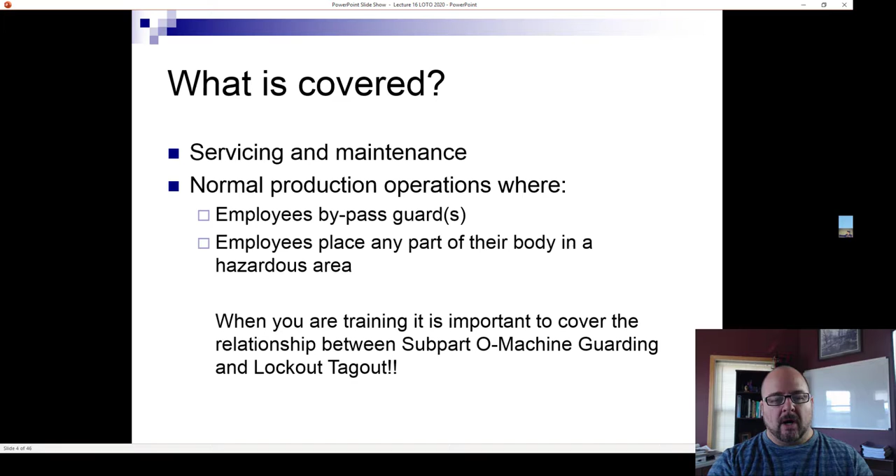So this general industry standard does not cover these other industries. It doesn't cover normal production operations. Also, it says cord and plug under control. And this is probably something you can relate to. If you go into your garage or your dad's garage, and he's got like a table saw or a reciprocating saw, any device that is just a plug, if you can unplug something and stick it in your pocket or be in control of it, it doesn't need to have lockout tagout.

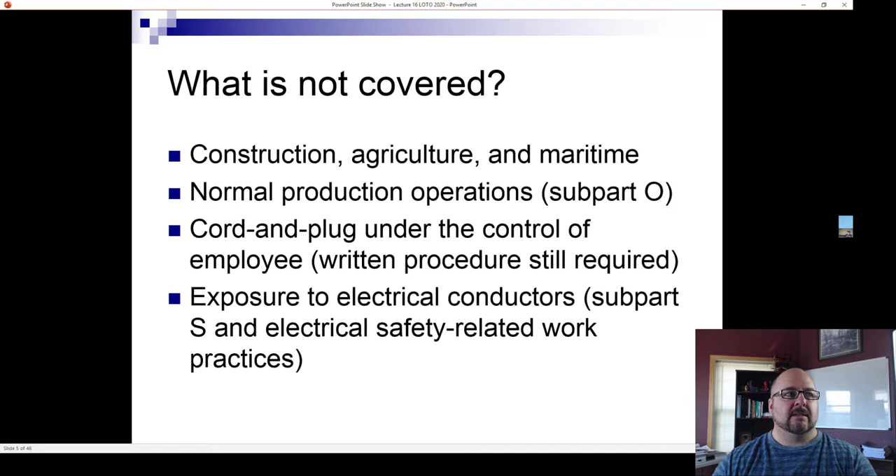It's more or less when you're at a sub panel and you have to turn off the sub panel. So electrical sources are usually above your typical household, so you're talking 220 or higher, in which you pull the switch. And that's when you lock it out, because you don't want somebody to turn it back on while you're working on it. De-energize it. You could either be exposed to the energy source, or it could actually activate the machine, and then you could get caught up in it.

Here are the different energy types. Electrical, very obvious, both shock and to get a machine moving. Mechanical energy, so if something is already moving, you've got to make sure that there's a brake to it, so you don't get hit. Hydraulic is liquid under pressure. Pneumatic is air under pressure. Chemical is a little bit more sophisticated.

I actually cited a hotel for lack of lockout tagout for their pool system, because they completely evacuated several city square blocks, and I went in and investigated. After a long holiday weekend, their pool was kind of cloudy, but the custodian who typically took care of the pool was on vacation. So they called in a pool guy. He came in, saw the murky water. He knew he had to shock the system.

And so he removed the screw cap for the tower that disseminates; as the water circulates, it adds the chlorine to it, and it might even have been bromine. He saw the tablets, filled up the tower, and as he was screwing the tower cap back on, all of a sudden it just exploded, and he was doused in bromine acid and everything else. So he dove into the pool to protect his eyes and his face, but the gas that was produced evacuated everybody, because it was a chlorinated or brominated gas, and that stings when you breathe it in or it touches a mucous membrane.

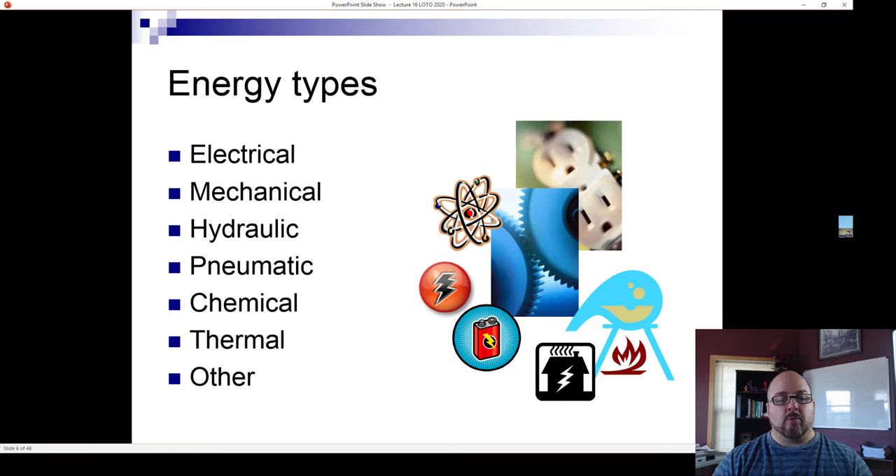Thermal as well. There could be stored thermal heat or a delivery system, like a compressed or a high pressure steam. But there's other things as well. Anything that could be delivered to a machine that if left on could affect the person or start up the process needs to be locked and tagged out.

What this basically means is you can't just do this alone. You can't walk up to a machine and go, I'm going to figure this out myself. You either have to have a maintenance person who knows all the energy sources or contact the company or whoever installed the equipment. You need to know where all the lines of power or energy go to the machine, and then know which valves are the ones that turn it off or on.

You turn it off, and then you need a locking device, something that prevents anybody from moving it from the closed position, and then a tag as far as who is the person who has the key that has the ability to remove it in order to put it back on.

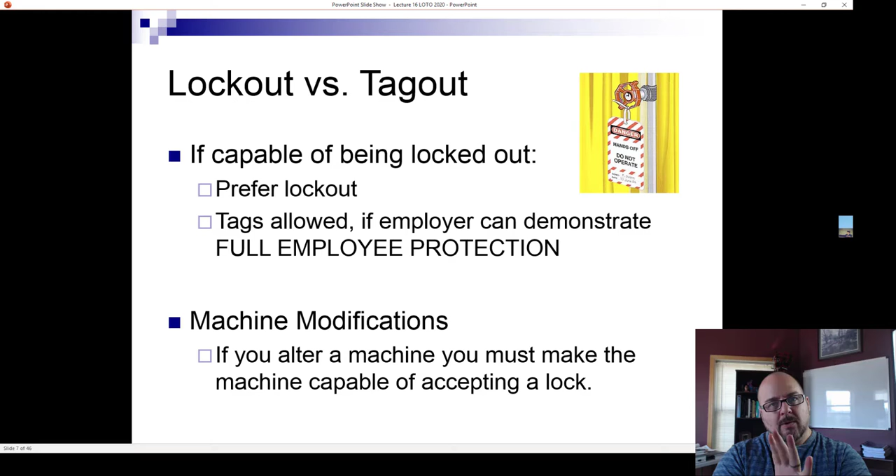And well, they'll get into it later when you watch the Brady stuff, but you should assign a particular color, or you should even have the photo of the person, so you should know whose lock it is without even looking at the tag. But the tag needs to be there as well. And this is for any servicing and maintenance. So the normal operators typically aren't involved. It's usually people who have specialized training that go through the lockout tagout procedure.

One thing I want to say is this is considered a performance standard, which means in order to be compliant, you as the employer have to demonstrate that it's effective. So you have to go a little bit further than if you just come up with a program. Even though a program should be based on evaluation and the best solutions, you have to demonstrate that this is an effective technique in order to de-energize a system or isolate energy.

An affected employee versus an authorized employee. An affected employee is someone who may be in or near during a service or maintenance. The authorized are the maintenance people or the servicing people. There's a lot more training when you're authorized versus when you're affected.

Capable of being locked out. I don't know if I've ever seen a system that can't be, even when you have potential energy. Let's say you have a press and it's a heavy press, and if a line or a brake was to give out, it would slam down. Well, you can put in blocks, and what you should actually do is rest whatever that potential weight is on the block, and then it could never give way. You need to have an energy isolating device. You need to be able to close it down or somehow shut it off. There's usually a way. And if you don't have a way, put one in.

I know that one reason that somebody may not de-energize before they do any maintenance or service is, to give the example of electrical, if you're relying on the basic circuit breaker in order to de-energize, and that circuit serves multiple machines or multiple stations. Well, what you need to do is put in sub-panels for each individual piece of equipment so it can be locked off right at it, because otherwise you're actually shutting down those other operations.

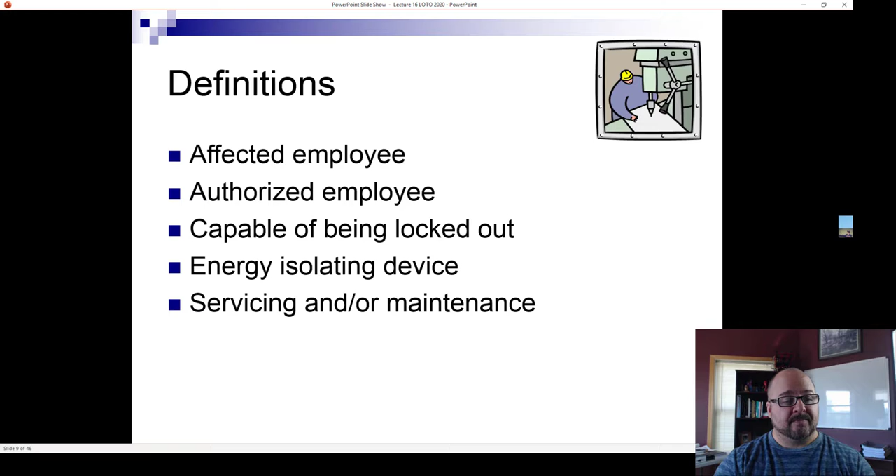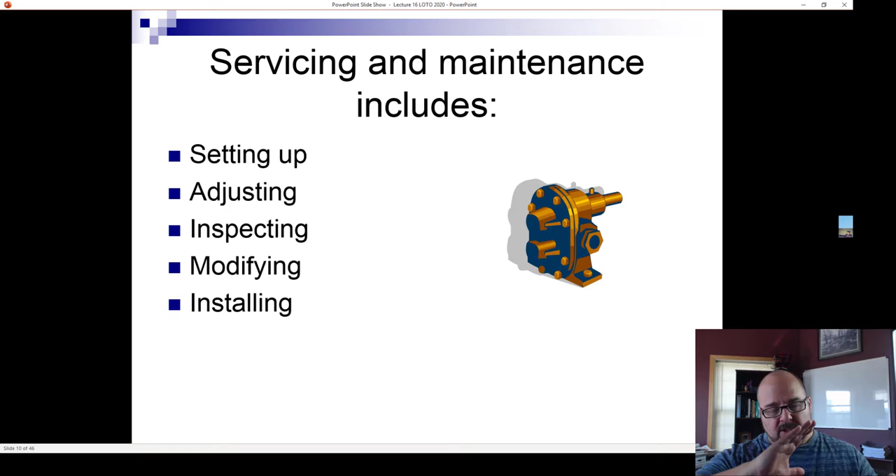Okay, this is pretty self-explanatory, I think. It's whether the machine broke down or you have a preventative maintenance schedule. The machine is going to be opened up. It's not going to be in production. It's shut down for whatever reason to either get it working again or make sure it keeps working as needed.

You do need a written program. Each piece of equipment needs its specific procedures, unless they're exactly the same machine, which is pretty rare. Then you can share them, but each machine really needs its own. You need to again train the authorized and the other. What was the name? Affected. And then you do need to periodically review.

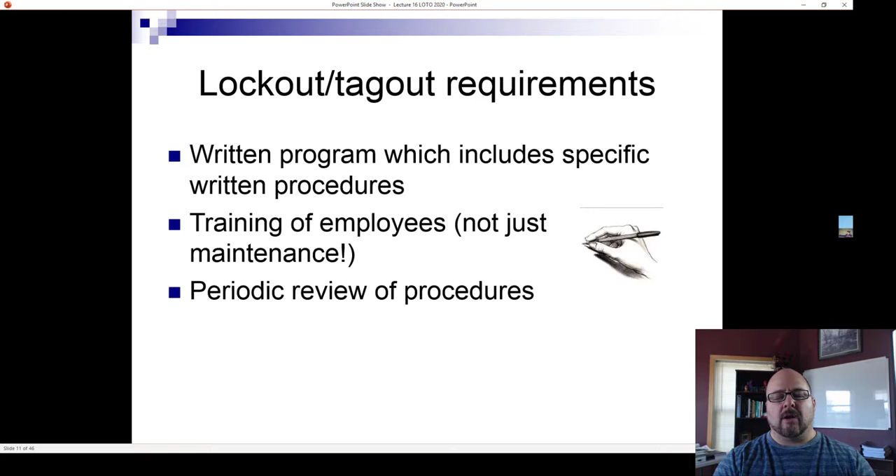A lot of my interns do lockout tagout review. I'll show you a picture of one before. This used to be just a list, like shut that down. Now everything is laminated, it has pictures, things are color coded. I almost would like it if the checklist was on a tablet, with other sorts of technologies as far as where you are and everything else.

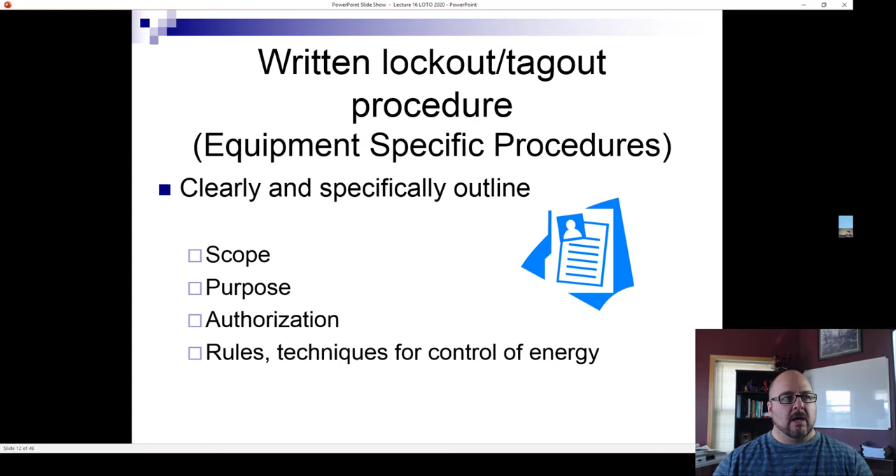It'd be great if a person goes through, and there's a video that first explains and reviews what the issues are, what this machine does, and then it goes, okay, now what we need you to do is find this, and there's a picture of it, do this to it, and then click OK. And when you click OK, another device verifies that it's correct. There'd be a lot of extra technology, but it would be foolproof.

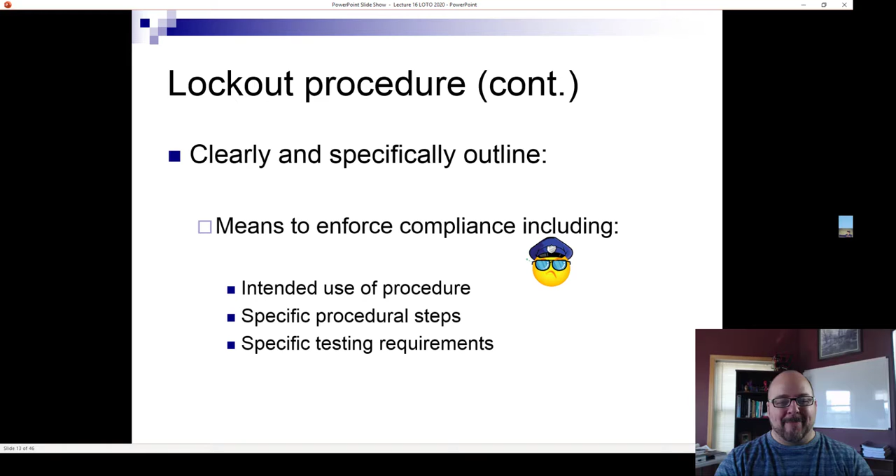Got to make sure that people do this too. I was once on a walk around before a mock OSHA audit, and there's a guy working on a machine. When I walked by, he kind of looked over his shoulder at me, and I'm like, why did he do that? I asked the people giving me the tour, is that locked and tagged out? They went and found out, and it wasn't. Poor guy got in trouble, and he had to go lock and tag it out then.

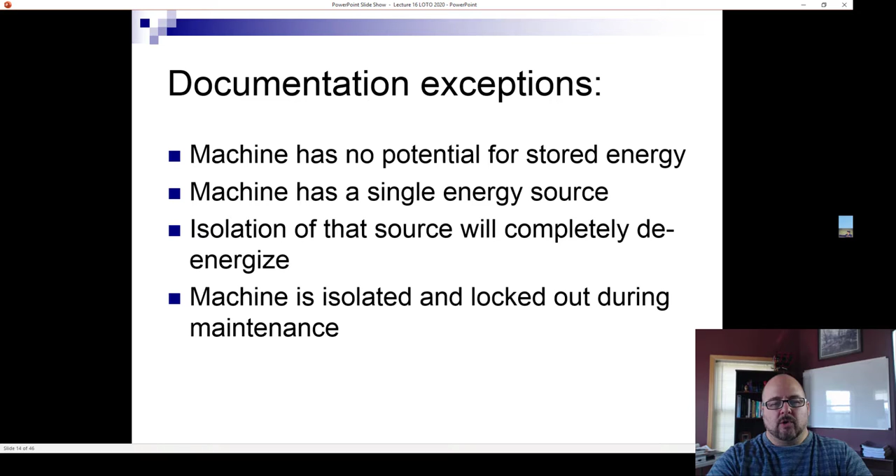Machine has no potential for stored energy. These are the documentation. If you can eliminate the issue, you don't need it. Single source, so if you can unplug it and keep control of the plug, that will completely de-energize the machine. So there's different exceptions, but you need to document whenever you do this, and a supervisor needs to be involved. It's much like confined space entry, which we'll cover in the 6th module.

There are all kinds of energy control procedures, starting with the notification of employees. You prepare for shutdown. There are steps for shutting down. If there's a unique way to start the system back up, talk about that too. Not only do you need to isolate the energy, lock and tag it, you also need to attempt to turn things on to make sure there's no stored energy, that all stored energy is either dissipated or not there.

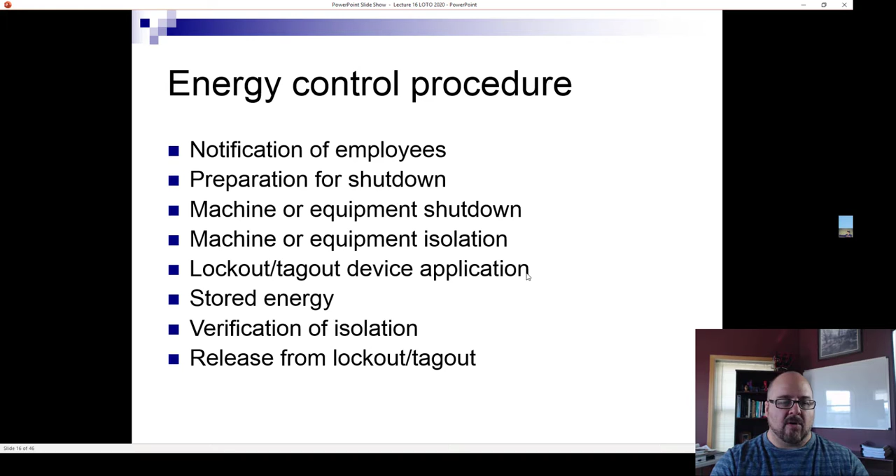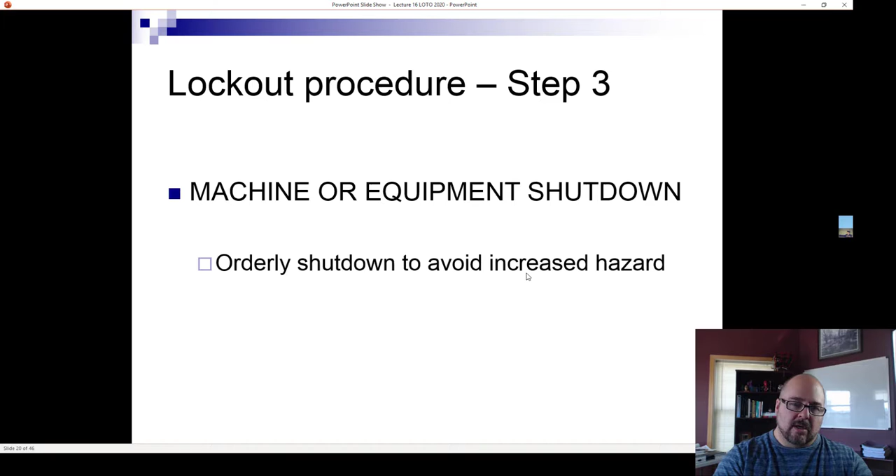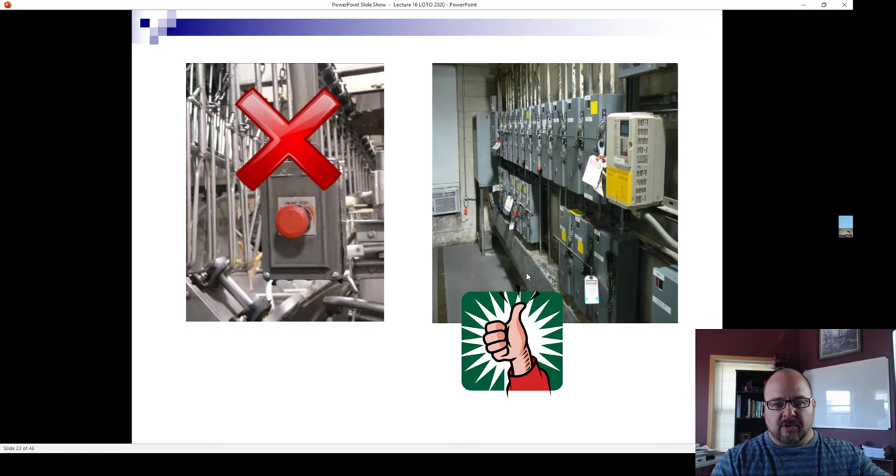You see, an emergency stop is not considered lockout tagout. Neither is an interlocking guard, and we'll talk about it when we do the safeguarding, but there are certain things where there's a guard, and when you open it, and there may be multiple reasons for opening it, what it's supposed to do is prevent any more cycling of the process. That's also not considered lockout tagout. You need to actually isolate the energy, ensure that it's been dissipated before you go in and start working.

Relieving stored energy. Stored energy examples are here. Verify that it's been isolated. And then once you've completed your work, release from lockout tagout. So it seems fairly simple. In most cases it is.

But if you have a project that takes multiple days or multiple shifts, as a new shift comes on, let's say you have an electrician and he's going to leave and there's a new electrician coming in, he has to remove his lock, and the new lock has to go on by the new electrician who's going to be going in. There needs to be this sort of control that way.

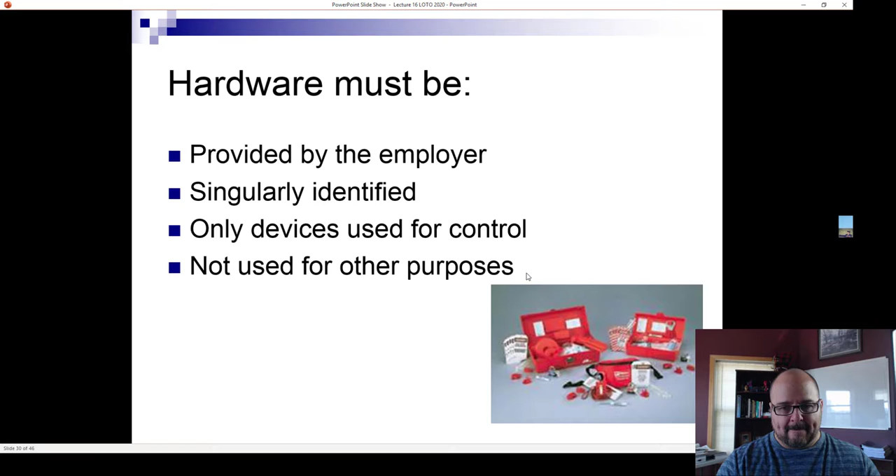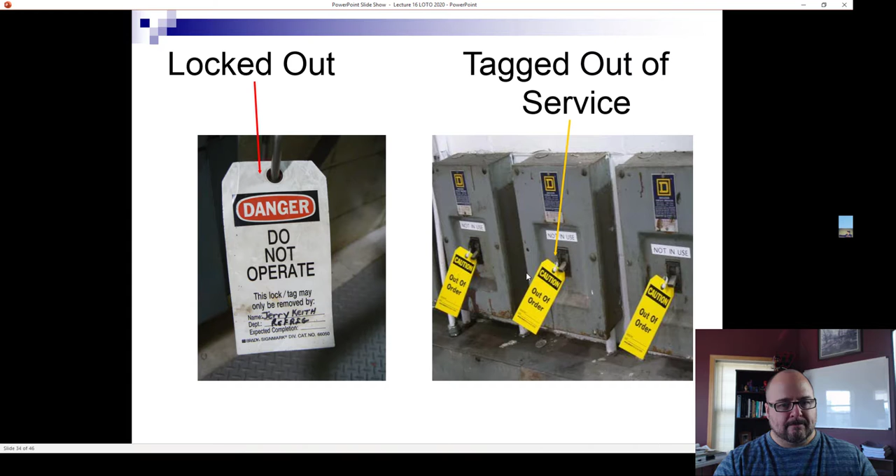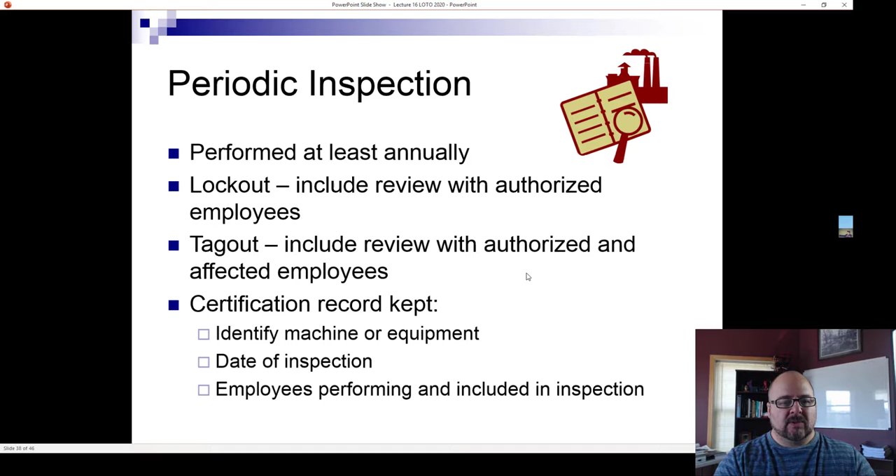At least annually, you need to review. Just make sure that everything is working out. Yeah, make sure you certify when you do those reviews. Authorized employees require retraining. Affected, not so much. It's when everything's changed. Yep. And make sure there is evidence or documentation that the training was done.

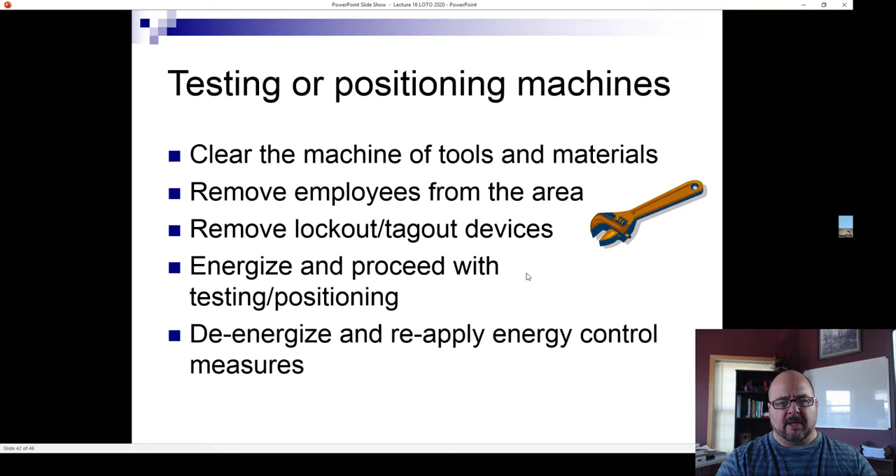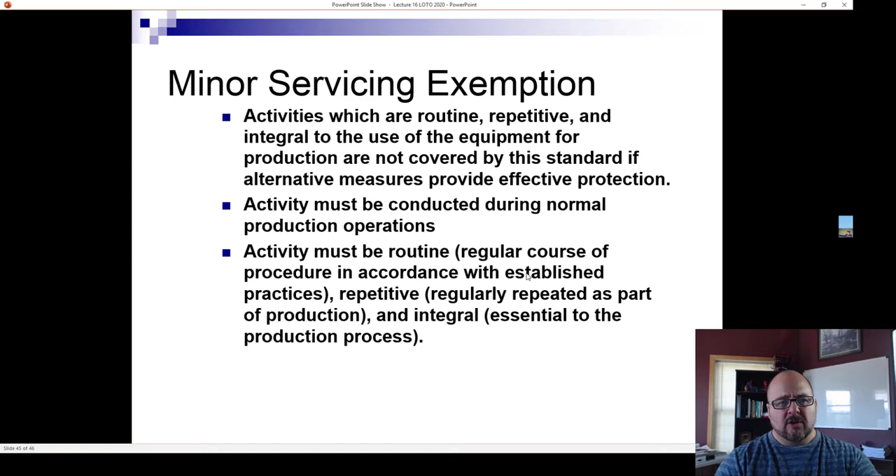This is just testing or positioning machines, so this is just making things work better. If you have multiple people working, it may be easier for everyone to store keys or multiple things just in a lockbox, and then you lock it. So therefore, nothing can be activated until everybody finishes their work and removes their lock, and then you can get into the lockbox. Then you can remove the keys and remove the other locks. It's just sort of a secondary. Sometimes it gets really messy when you have too many locks on everything. You're allowed to do that for group work. There's the minor servicing exemption. Yeah, pretty self-explanatory.

And that's everything. So, that only took about 15, 16 minutes. So I want to show you what I have for you, because this is pretty awesome. All right, so I have a link to OSHA's lockout tagout page, pretty self-explanatory. Take a look at this. It's good stuff. More importantly, though, is everything else that I have for you. This is awesome. Safety Professionals Expanded Guide to Lockout Tagout. This is directly from Brady.

So when there's an ANSI standard that supplements or supports an OSHA standard, you have to pay for those ANSI standards. But companies who sell products that are meant to meet or exceed OSHA standards will actually weave in all the requirements and let you know what they've provided meets those standards. And so that's where you can get this free stuff online that addresses that. So this is really great stuff.

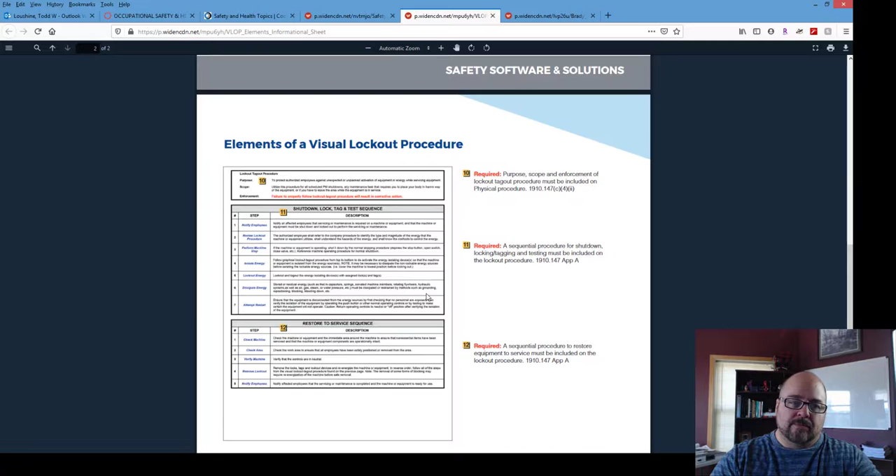Also, there's this elements of a visual lockout procedure. So this is what they do. They use color coding, they use pictures, they use arrows. I don't want to say dummy proof, but it's meant to be very easy to follow so you can protect yourself. And it's all laminated and everything. And then finally, they've got this checklist for a program. What you can do is go through, and they've got the OSHA paragraphs actually identified.

That's pretty cool. Additionally, there's all these great videos. You have to watch these. Go and check this stuff out. It's awesome. And it should give you much better insight into what the OSHA page has or what I had just covered. Because I really covered sort of a 100-foot viewpoint of what lockout tagout is. Because it does need some level of complexity or sophistication depending on the equipment. Sometimes repositioning things or having well colored and labeled valve points are all really important, and they need to be accessible as well. So Brady points all that stuff out.

So in the next lecture, we're going to get into electrical safety and arc flash, which relates to this. Then we're going to get into machine safeguarding. So this lecture and the next two are pretty much intertwined.